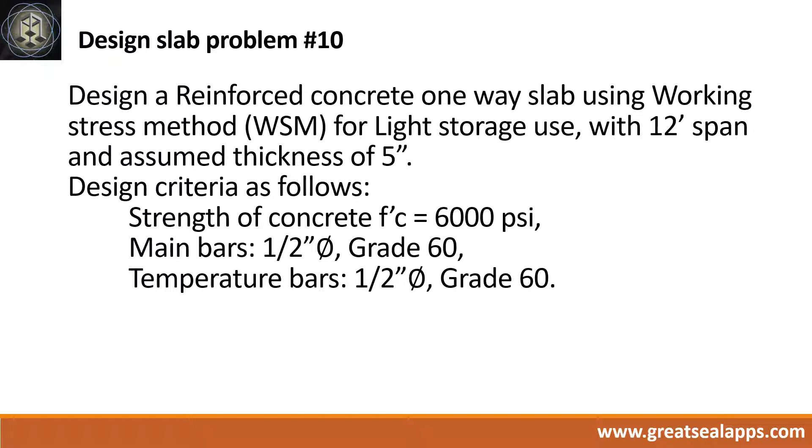Design a reinforced concrete one-way slab using working stress method for light storage use with 12 feet span and assumed thickness of 5 inches. Design criteria as follows. Strength of concrete 6000 psi. Main bars half-inch diameter bar grade 60. Temperature bars half-inch diameter bar grade 60.

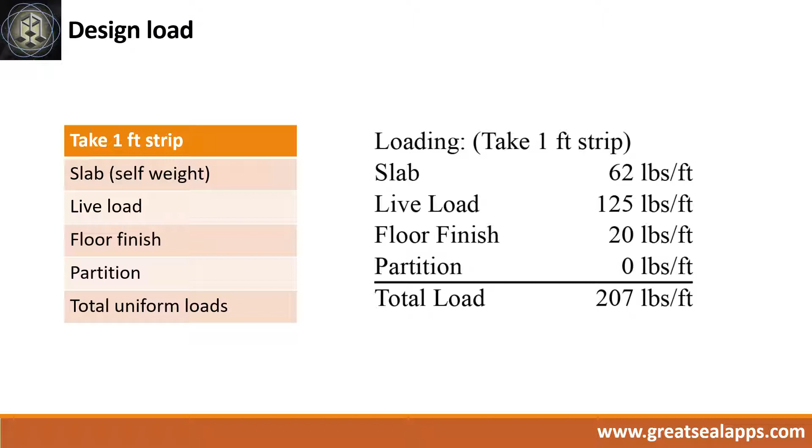The uniform load for 5 inches thick slab is 62 pounds per foot. A light storage live load is 125 pounds per foot. Floor finish is 20 pounds per foot, for a total load of 207 pounds per foot.

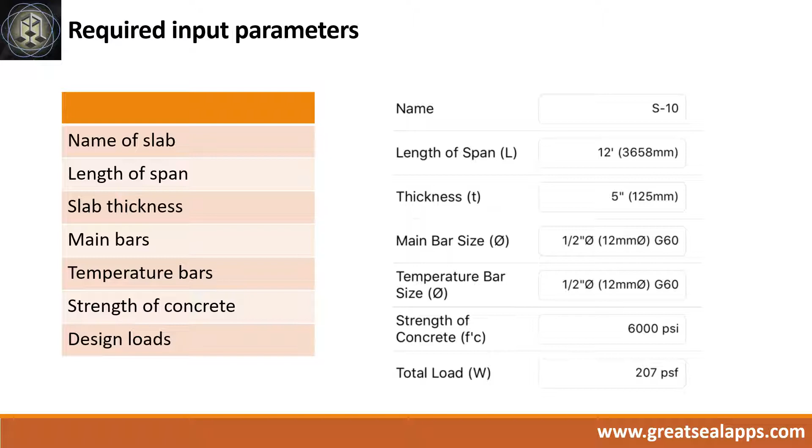Enumerate input parameters required. Name of slab S10. Length of span 12 feet. Slab thickness 5 inches. Main and temperature bars half-inch diameter at grade 60. Strength of concrete 6000 psi and total load is 207 psf.

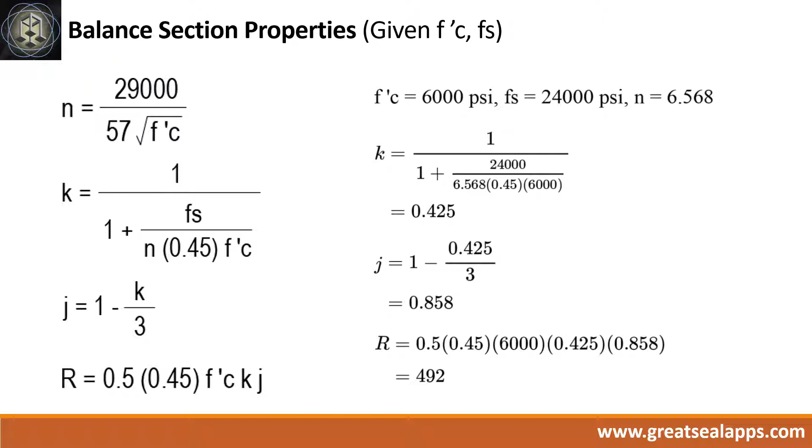Given f'c equals 6000 psi, Fs equals 24,000 psi, the balance section properties are as follows. N equals 6.568, K equals 0.425, J equals 0.858, R equals 492.

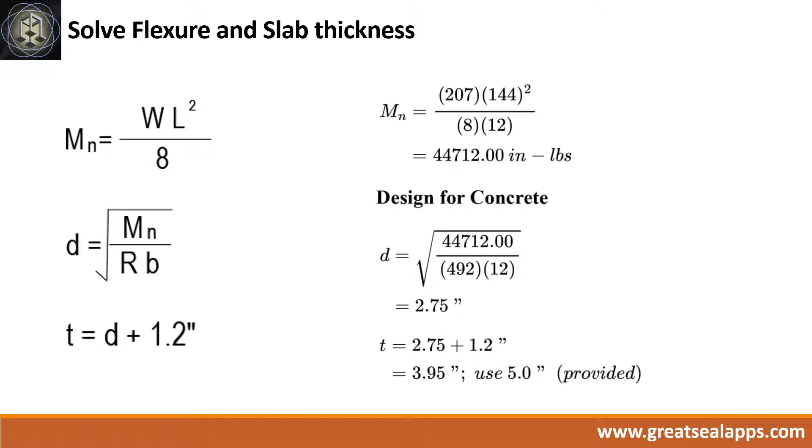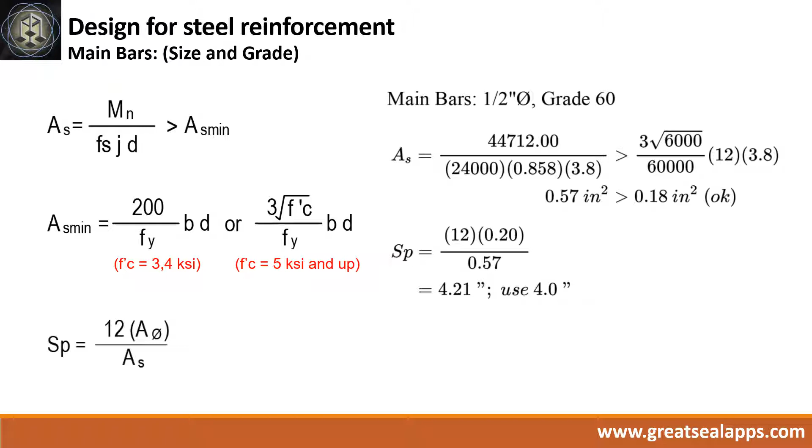Given M equals 44,712, Fs equals 24,000, J equals 0.858, and D equals 3.8, the area of steel is 0.57 square inch. The spacing for half-inch diameter bar is 4 inches. The area of steel for temperature bars is 0.108 square inch, and the spacing for half-inch diameter bar is 16 inches.

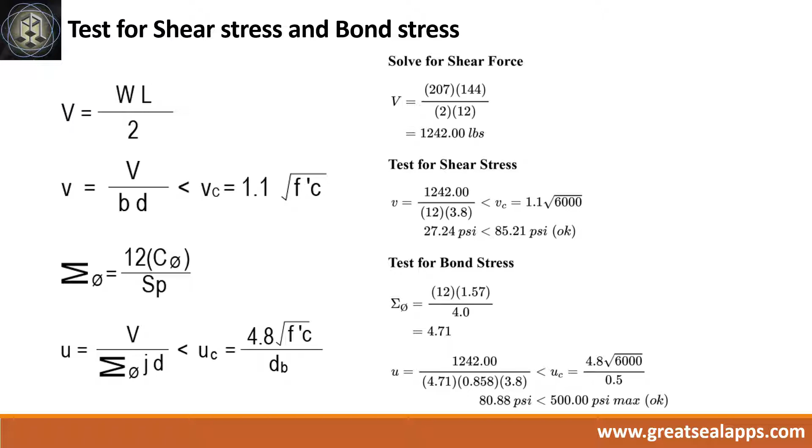The shear force is 1,242 pounds and shear stress is 27.24 psi, less than 85.21 psi. The total bar circumference is 4.71 and the bond stress is 80.88 psi, less than 500 psi.

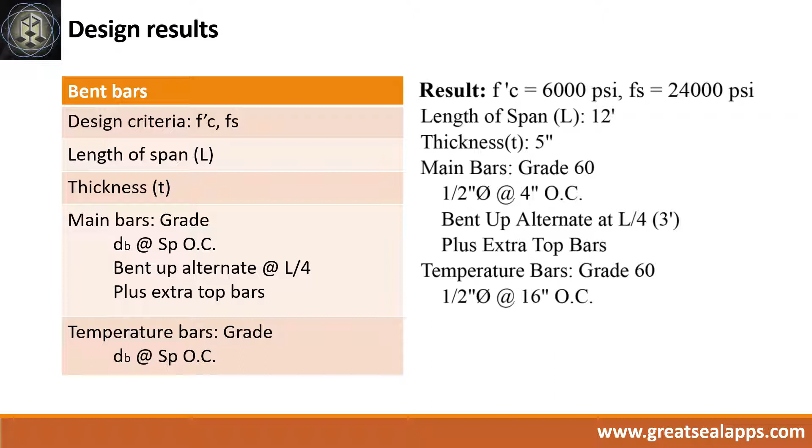Design results are as follows. f'c equals 6000 psi, Fs equals 24,000 psi, length of span is 12 feet, thickness is 5 inches, main bars of grade 60, half-inch diameter bar at 4 inches on center, bent up alternate at L/4, plus extra top bars, temperature bars of grade 60, half-inch diameter bar at 16 inches on center.